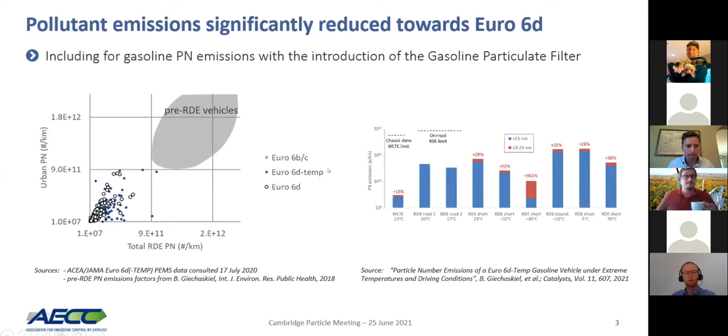So we achieved already good progress, but I think even further innovation is to come, and this will come with the next step in the emission legislation, the Euro 7, which will drive further emission control technology innovation. This process is ongoing, so the expert working group established by the European Commission, the so-called AGVES group, has held several meetings over the past years, including 2021 meetings up to the end of April. That was set to be the last meeting of the AGVES working group.

In parallel, there has been a consortium called the CLOVE Consortium, which is a consortium of engineering houses and academia you see on the right. They have been working on behalf of the European Commission on technical input towards the European Commission. And they presented scenarios for light duty and heavy duty vehicles, and will also provide further input for the European Commission impact assessment.

Also at the UN level in the PMP informal working group, activities are ongoing which are related. So in PMP, a PN10 measurement procedure is being developed, so to measure PN emissions with a cutoff as of 10 nanometer, whereas the current procedure in place is as of 23 nanometer.

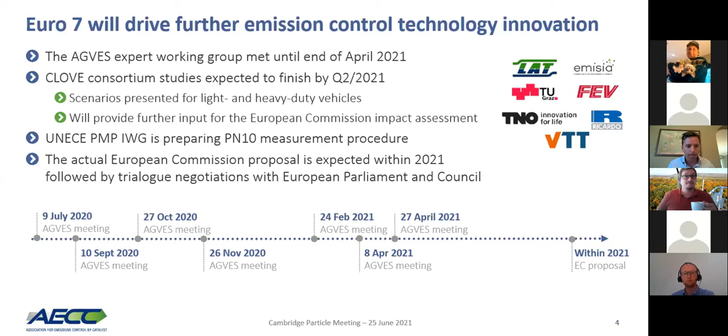We as AECC are conducting several demonstration programs, both for light duty and heavy duty, where we are investigating ultra-low emissions with state-of-the-art emission control technologies and really working in an integrated powertrain approach. So it's really the emission control within the powertrain. So together with the engine, also with lubricant, with the correct fluids, and also the calibration of the system to make sure that everything works well together.

And we are taking also on board the topic of low CO2 emissions through testing of renewable fuels. So to validate the low pollutant emissions on these renewable fuels, and then to show the low CO2 emissions that can be achieved. Today I will focus on the light-duty gasoline demonstrator vehicle, which is a project which is still ongoing. So I'll present to you some preliminary results and mainly focus on the particulate number emissions.

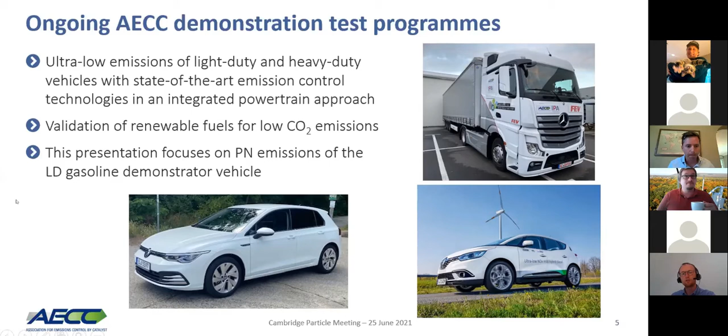The vehicle that we are working on is a C-segment vehicle, has a 1.5 liter engine with 4 cylinders, some technology like variable valve train, cylinder deactivation is on board. And also we have a 48 volt mild hybrid on board. So this is entry-level hybridization with a so-called P0 configuration. So it's an electric motor which is integrated within the belt of the engine. And so it doesn't allow to run only on the electric motor, but the electric motor can support the

internal combustion engine. We start from a Euro 6D type approval situation of this vehicle, which has a gasoline particulate filter in combination with a 3-way catalyst. And that system we then took out of the vehicle and we put in the AECC system, which I will explain on the next slide.

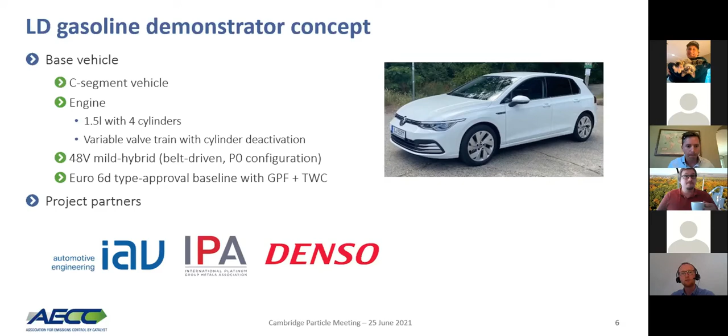Let me also acknowledge project partners because we're conducting this in partnership with others, and this support is highly appreciated. So we're working together with IAV, IPA, and Denso on this.

As mentioned, we took out the original emission control system of the vehicle and then put in place the AECC system, which is visualized here at the right. So it's a combination of a close-coupled 3-way catalyst with then an underfloor system that consists of a catalyzed gasoline particulate filter, a second 3-way catalyst, and also an ammonia slip catalyst. And we're trying to cover durability up to the extent which is possible in such projects. So we're using bench-aged components targeting 160,000 kilometers.

And the lambda control of this vehicle, we're, let's say, working further on what is available in the vehicle as it is on the market as Euro 6D. So there are 2 lambda probes, one before the close-coupled 3-way catalyst, which is a wideband lambda probe, and then a second lambda probe behind the 3-way catalyst, which is then a 2-step lambda probe.

We're conducting several tests both on the road and in the lab and have different instrumentation to measure the different pollutants. Just some words on that. So on the chassis dyno, you see it here visualized. We have different sampling points before the 3-way catalyst, in between the close-coupled and underfloor system, and also at the tailpipe. And this includes FTIR and also PN10 equipment. And on the road also we have a standard PEMS, but in addition also prototype PEMS to be able to measure ammonia, N2O, and also PN10.

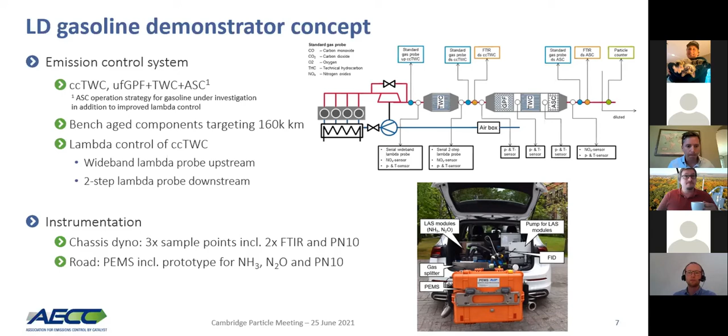Not to go in details here on the specification of the devices, but just to give you some idea on how it's looking like when we are testing the vehicle, and then specifically for the PN measurements that we're doing. So if we are testing on the chassis dyno, you can see here the vehicle then is equipped with the PEMS, so we keep that on board also when measuring on the chassis dyno. So the PN10 data I will show will mainly be from the PEMS device.

And then there's a lab measurement PN10, which is then after the dilution tunnel. So it's measuring here. And if we go to the road, then of course we rely on the PEMS result. And that's why I will focus on the PEMS data, because we have that for both on-road and chassis dyno measurements.

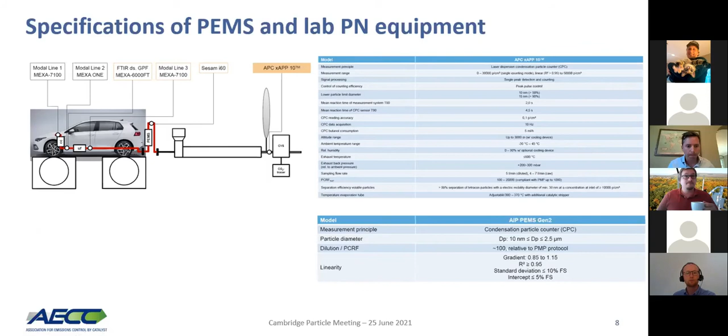In the program, we try to cover a wide range of driving conditions to then explore the emission performance over that range of conditions, trying to go beyond also the Euro 6 RDE boundary conditions. And as mentioned, we have a combination of chassis dyno tests and road tests. And we're trying to cover mainly a combination of ambient temperature variation and then also driving style.

And this is shown here at the top right for the driving style, with a parameter called V times A positive. So this is the vehicle speed multiplied with the positive accelerations and then taking the 95th percentile according to how it is done in the Euro 6 RDE legislation. And the red line shows, for the urban, the rural and the motorway part, what the current RDE boundary condition is within the Euro 6 legislation.

And so we are trying to cover a range for the driving dynamics. So from soft, we call it soft or smooth, which are the data points here at the bottom, over the normal driving on the road, the blue solid circles, and on the chassis dyno, this is the gray triangle here. We label that test as RDE aggressive as it is on the boundary condition of Euro 6. But we then also have aggressive driving on the road, which actually goes beyond, which is here the open blue circles. And we're combining that then together with the ambient conditions.

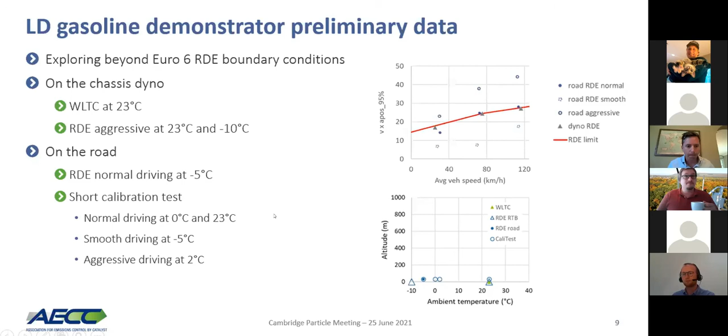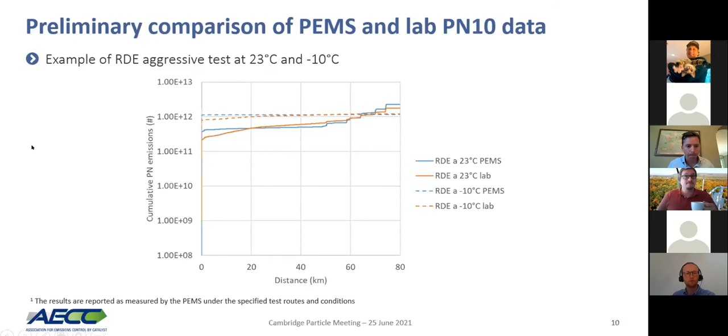If I give you the overview of the data that we have measured so far, I use a cumulative PN plot for that. So you see cumulative PN emissions over the distance driven during the tests. And as mentioned, we have some shorter tests and also the full RDE test according to the legislation. Overall, ultra-low PN emissions are measured. It has to be noted that we're not checking the most challenging condition for the filter. As we are using aged components, soot and ash accumulation during that aging actually supports the filtration efficiency. That's something we will still look at, and I will mention it in the outlook.

But for the PN we see an initial cold start effect, and then for the rest of the test, near zero emissions. And that initial cold start effect depends on the conditions tested. If I plot the data at a distance of 16 kilometers, to have a consistent number per kilometer reporting for all the data that we have, then you can see that we have a variation in number per kilometer over almost 2 orders of magnitude.

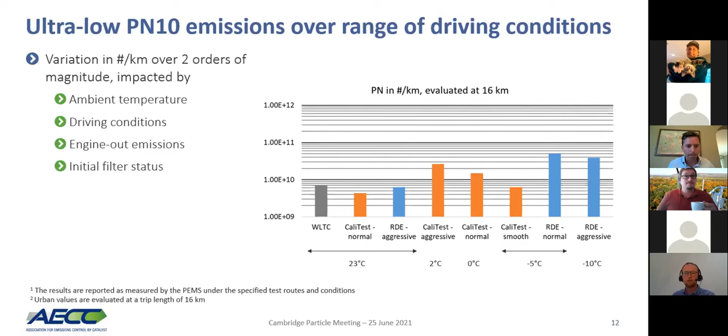But it's not always so straightforward. So for instance, perhaps we would have expected the -10 degree test to have resulted in the highest PN, but that's not the case. So there's also this impact of combination of the engine out and also the filter status at the beginning of the test, which anyway gives a test-to-test variability, even if you would repeat the same test.

So to conclude, we are looking into combining close coupled and underfloor components on a light-duty gasoline demonstrator vehicle. Looking into early light-off for gaseous emissions, then for urban emission control, in combination with consistent emission reduction over the range of driving conditions, and then specifically for the particulate emissions, measuring PN10 emissions, and these show to be controlled to ultra-low levels over a wide range of conditions.

We see an initial cold start effect and then near zero emissions throughout the rest of the test. Gaseous emissions will be covered in a publication at the SAE International Conference on Engines and Vehicles in September. We're still working on some activities this year. I mentioned the fresh GPF. As I mentioned, the aging of components actually helps filtration efficiency. So we will look into possible measurements with the fresh GPF to try to see what that result would be.

And then also we'll work on further thermal management measures on the system, by adding an electric heated catalyst to try to reduce the remaining initial cold start emissions. That's more for the gaseous emissions. But perhaps also with the change in thermal management strategy, engine out PN emissions can benefit from that. We will investigate that.

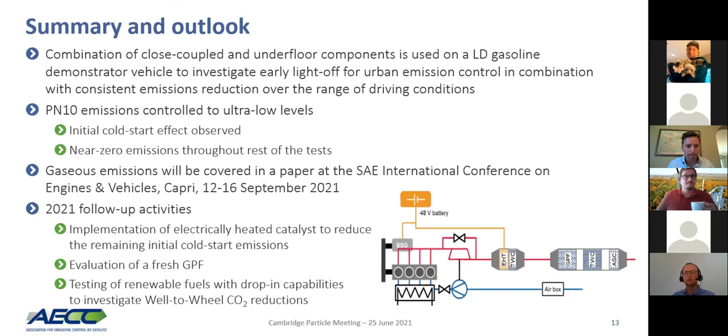The first one comes from David Kittelson, and he asks, what fraction of new gasoline vehicles are equipped with GPF, and what fraction of the current light duty fleet would that be? Okay, thanks for that question. As far as we can see on the data that we have, mainly judged based on the PEMS database of the car manufacturer associations, ACEA and JAMA, all the direct injected gasoline vehicles coming to the European market as of the introduction of RDE, so the Euro 6d-TEMP and Euro 6d stages, are equipped with GPF.

So it's really with the introduction of the real driving emission regulation that all the direct injected gasoline vehicles are equipped with a filter. Of course, how to quantify the fraction for the current fleet, I'm afraid I don't have such quantification with me. But it's the new vehicles that are being introduced with that, and as the fleet renews, this will ramp up in the fleet.